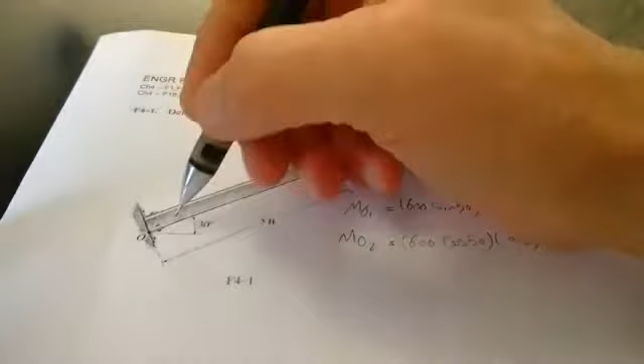So there's a question about, on the first one, how you interpret the direction of rotation. It's pretty clear that F1 is going to cause a counterclockwise rotation of that beam about O, and what you're calling F2 is oriented along this axis. It may not be so clear which way F2 is causing things to rotate, right? But realize that your fulcrum or your axis is right here at O.

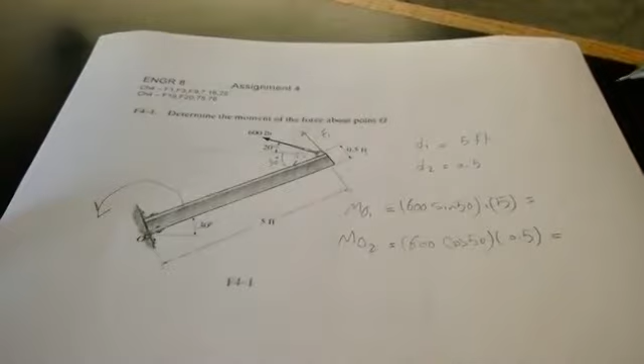What I tell people is to think of a water wheel. So if there was a water wheel right at O, which way would the vane spin if this force F2 hits it?

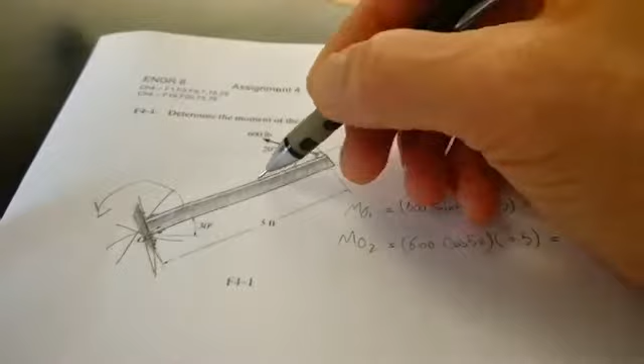It too is going to make it go this way, right? Yeah. So if it's traveling to the left above the axis, it's going to make things go counterclockwise. If it's below, it's going to make things go clockwise. And another point on this problem is you could kind of make more sense of it if...

Oh yeah, that's a really old eraser. That's okay. I was just going to erase some of this stuff here.

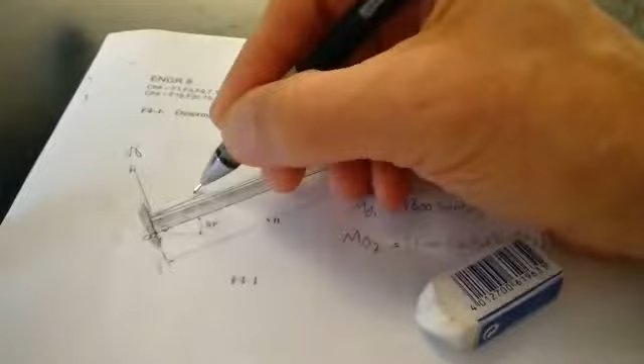In many situations they give you a problem that's sort of crooked or whatever, and you already sort of figured that out, but you can clarify what you're doing by saying, well, you know what, I'm going to make this my y-axis and this my x-axis. Maybe it comes out of O. So that way, instead of F1, you could call this Fy, and instead of F2, you can call it Fx, which kind of helps, I think, keep things a little straight. Yeah. Thank you.

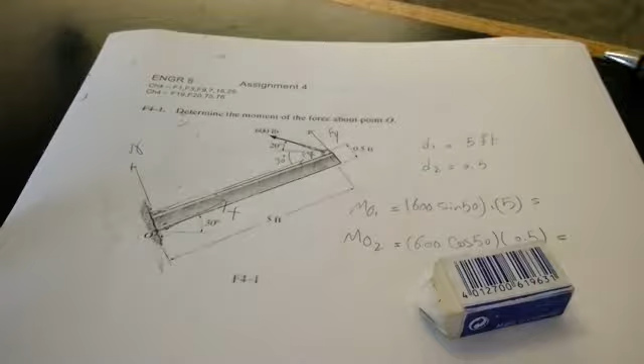Today we are doing more in-class problem solving, so guys are working together. And if a question gets elevated to where they can't figure it out themselves, then they'll come up here and I'll record it for online folks.

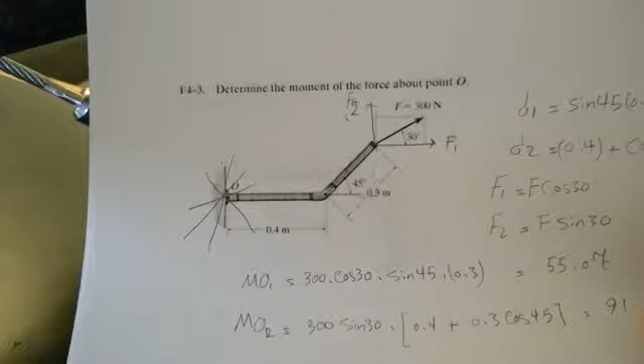So here you have a problem where you have to find Fx. And in this case, the axes are aligned vertically and horizontally, right? So it's really just the horizontal projection of F, right? You already know how to do that. What is it? Sorry, what is what? Well, your question is how do you find F1, right? No. How do you know if it's counterclockwise or it's clockwise? Oh, if the rotation is counterclockwise or clockwise?

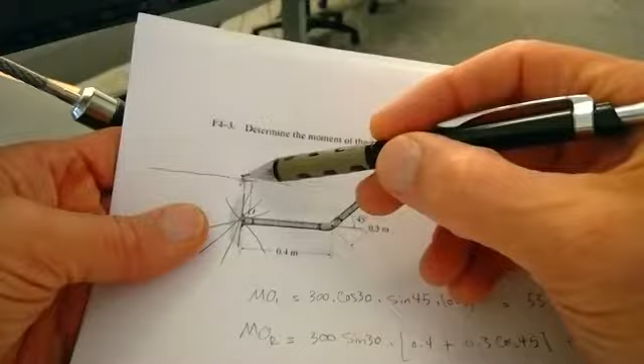Well, again, you imagine F, this is the principle of transmissibility. The force can be applied anywhere along its line of action. So in other words, you could apply the force here, but if there was like a bracket sticking up here, you could also apply it here, and it would have the same effect on the body. Because it's clockwise? It's counterclockwise. If the wind is blowing this way and you have a fan, it's going to rotate that way. Yeah. It's very simple.

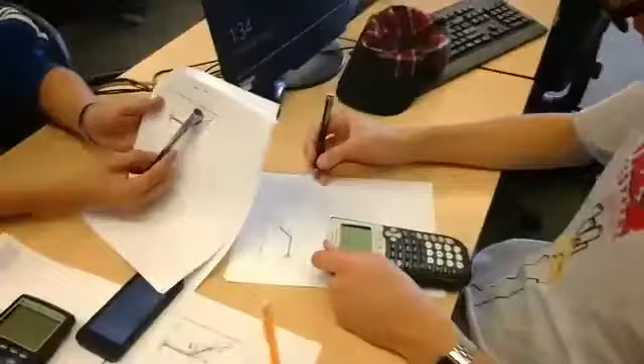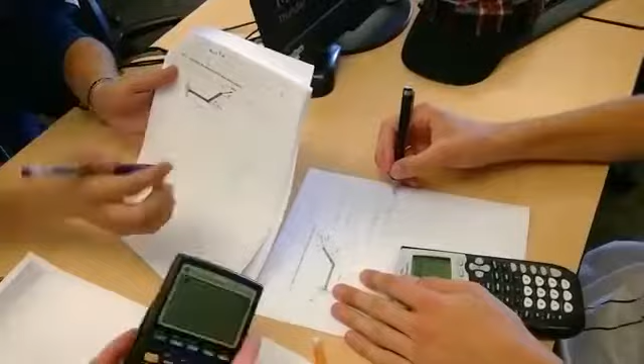No insights yet? Not so far. It's all pretty straightforward, right? Yes. I drew it like this. So since this whole thing is being pulled up at the y-axis by this force, which is 150, since it's counterclockwise, that's why I put positive. And then this one over here, which should be the same as this one, is being pulled by that component, like that. So that's why I put it here. That's the way I thought about it in my head. That's exactly right. It's just a little confusing.

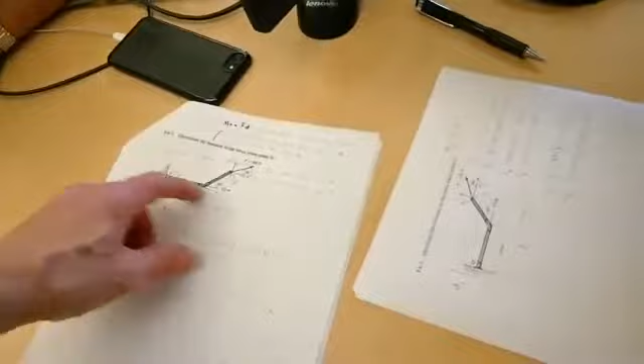And it also explains why, as this gets more and more tilted towards O, the net moment gets reduced more and more because these start to cancel each other out. The moment that wants to make it go this way from this component is going to sort of cancel out the moment that wants to make it go this way from this component, right? And then as this line goes straight towards O, they exactly balance out and the net moment is 0.

So what's the deal with having the negative sign here? Well, that's how we keep track of how they add together. Okay. But when you multiply that, there's no negative sign. Well, my instruction on the sign is to not worry about how the components contribute. A lot of people want to have symbols in there and they don't want to think about the sign. They want it to just come out of the computation. You're usually going to make a mistake if you try to do that.

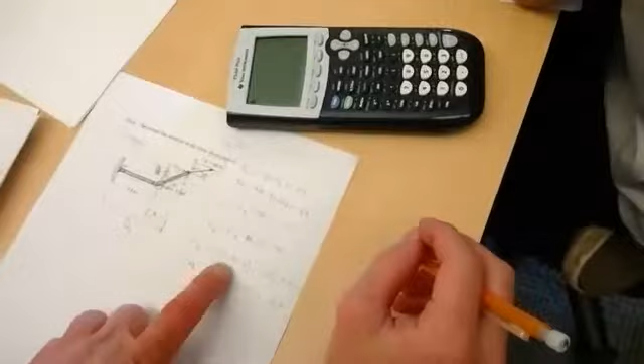So the way to make it so you don't make a mistake is to not worry about the sign when you're doing the multiplication. And then at the end, look at the number and ask yourself, is this component making this thing want to spin clockwise? Yeah, exactly.

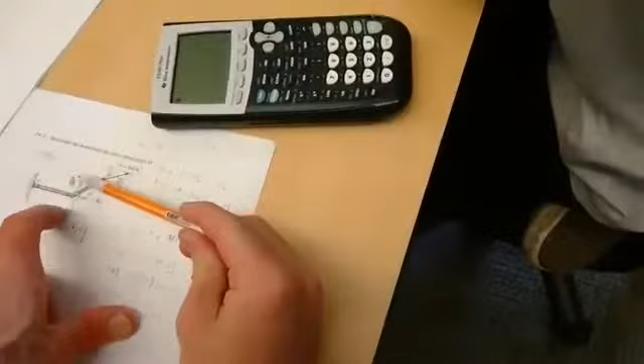Negative, or counterclockwise in case it's positive? That depends on the component. That's all you do. Just don't try to make the sign work out algebraically, because you'll never get it to work right. You have to look at the problem and it's by inspection, really. You can tell by inspection the way the sign is going.

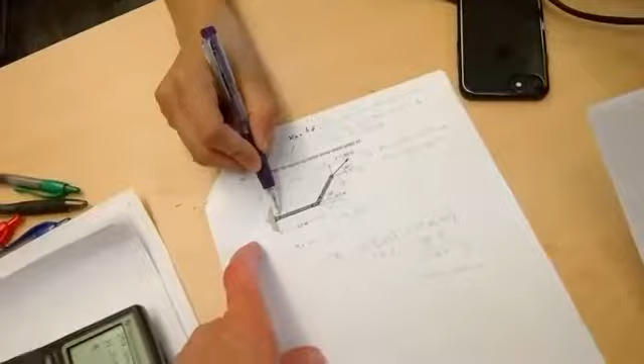So that's why these problems are in this type of course, because if this were to continue to increase, then it'd be in equilibrium. Is that what you mean? No, what I was saying is, if the direction of F changed so that the line extending from F would intersect O exactly, like this. So if the angle is a little bit less, right now it's 30, but if it was like 28 or 27, then it'd be perfectly aligned with O.

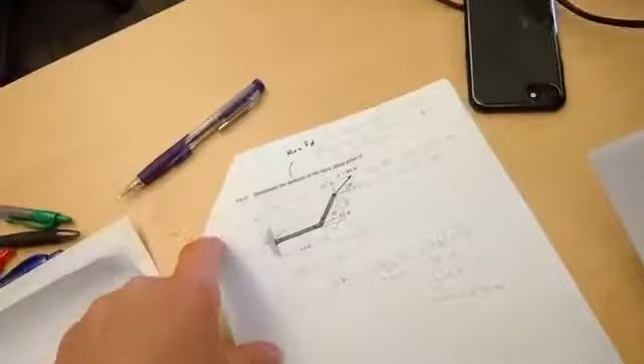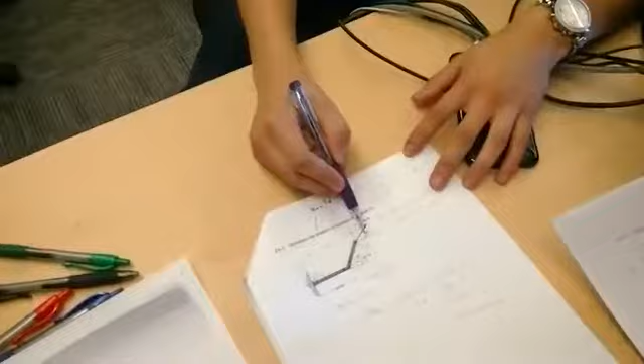In that case, the vertical component is still creating a moment that's counterclockwise, and the horizontal component is still creating a moment that's clockwise, but when you add them together, they add up to 0. So what you're saying is that if this increases, this angle's going to be smaller? No, I'm not talking about anything increasing. I'm just saying if the direction of F got changed so that this was like 27 degrees, and now it's coming straight out of O, that's why there's no net moment, right? There's no moment arm.

Right. And you can also prove it by these components, because now the vertical component, which wants to make it go this way, would exactly cancel the horizontal component, which wants to make it go that way. Yeah, that's interesting.

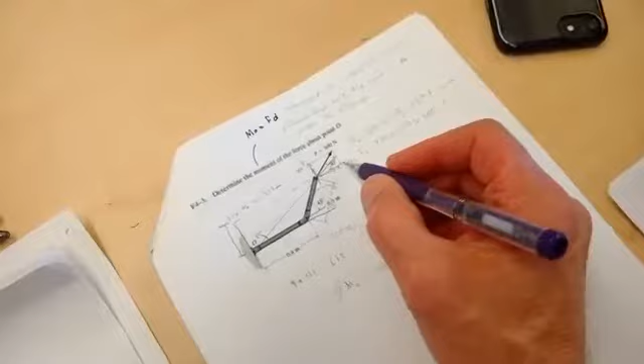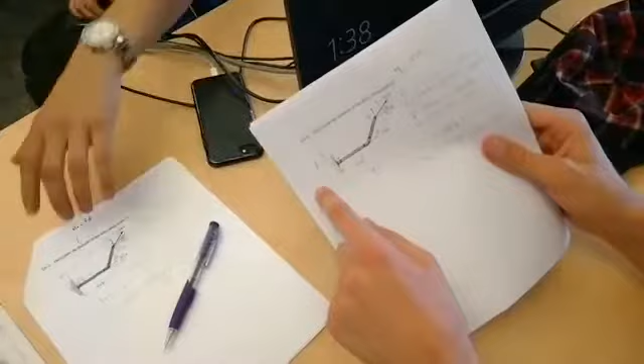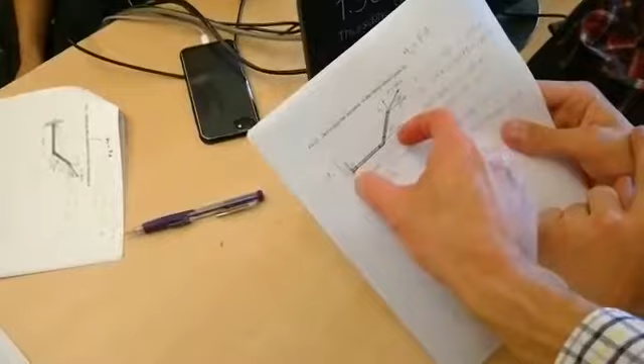So why is the y component negative if it's pointing to make it go counterclockwise? The y component has a moment that's going to be counterclockwise, so that should be a positive moment. Right. What are you calling MO1? I don't know what MO1 is. That's the y here. Okay. So if MO1 is Fy times... oh wait, so the 0.612, D2 is the moment arm for Fy. I don't know what the unit is. I think I'm just getting my numbers mixed up.

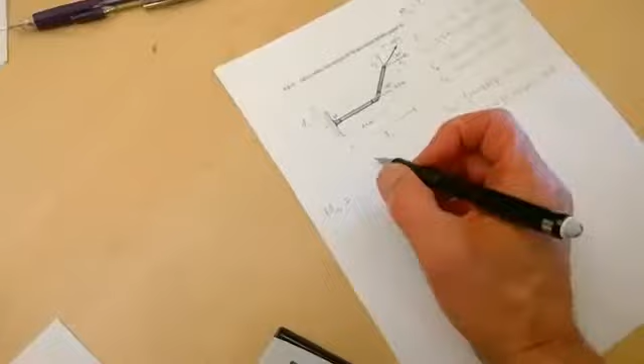Yeah, you can easily put the wrong D on the forces and then you get really wrong answers. So you have to be really careful about this. In fact, I would just say MO equals, you can use symbols here, right? It's Fy times D2. This will help you straighten things out. It's Fy times D2, and that's positive, right? And then it's Fx times, you haven't labeled D1, oh, there's D1. And it's Fx times D1.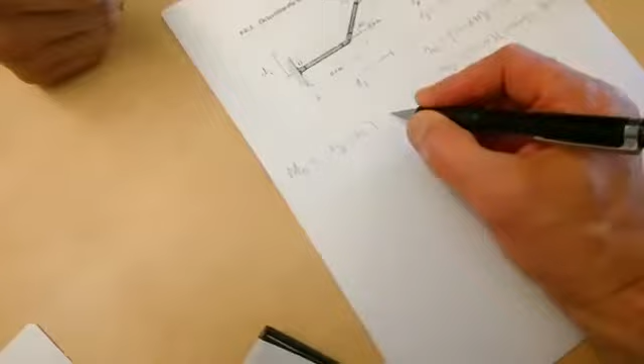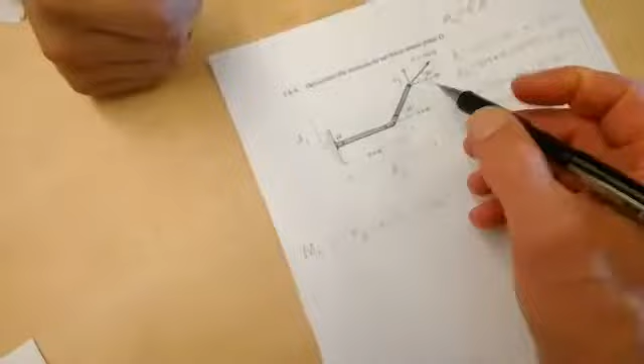Then you write these things out and look at each one. Is Fy times D2 going to make things go clockwise or counterclockwise? Look at Fy, pulling up right here. You can apply Fy anywhere along its line of action. So imagine this is a big water wheel. If this thing is pushing up on a water wheel, which way is it going to turn around O? Counterclockwise, so that's positive. I mixed up my components. Yeah, it's easy to do.

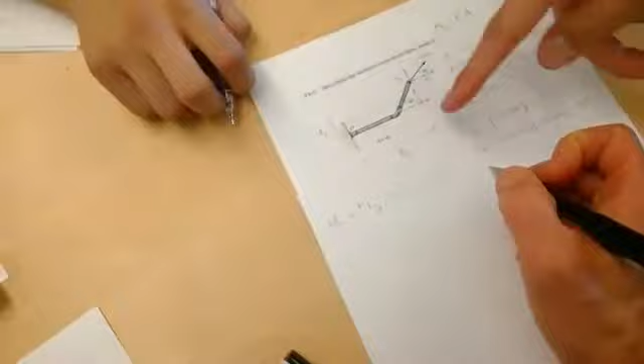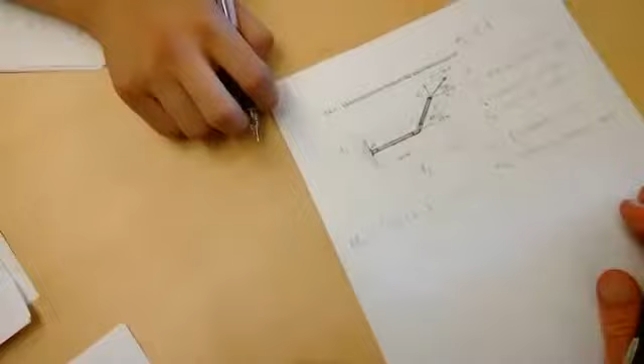And Fx times D1, again hitting that same water wheel, but now it's coming from the left and moving to the right. Which way is the water wheel going to turn? Yeah. Clockwise, right? So there's a minus there.

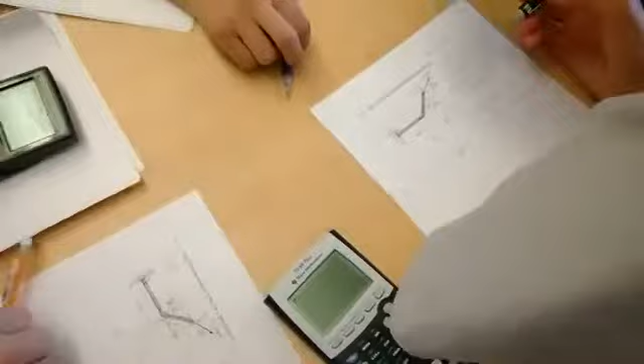The way I figured out if it's going counterclockwise or clockwise is, when you're looking at the y components, the line of action is horizontal, and the x components is here. So when it's horizontal, if you look at just the y, it's going to go that way. But the other way, it goes the other way. What you just said, I cannot parse. Try to say it again with fewer words. Hmm.

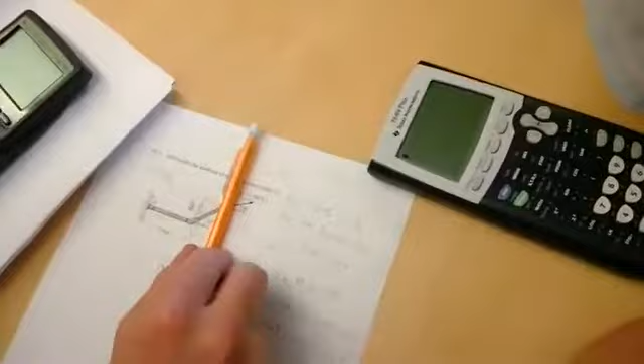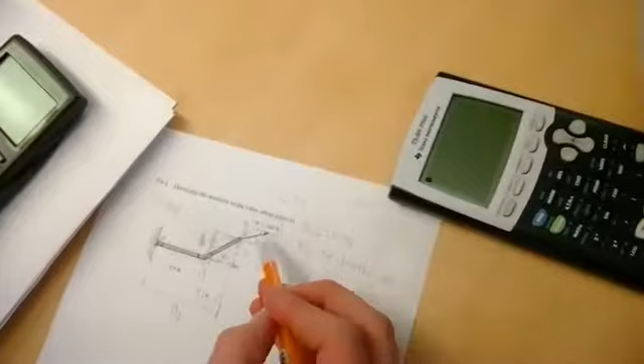When I was considering the fx for the direction, I actually looked at the vertical line relative to it, because that way you can see like it's going that way.

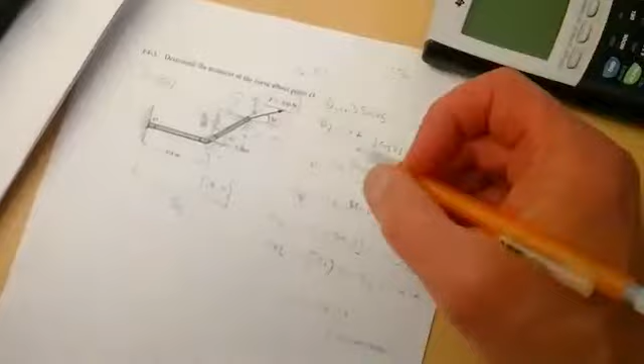You mean the rotational direction, the force is trying to go that way. So when you're looking at fx, you start to think about the vertical component. That really doesn't have anything to do with it. The vertical component of f doesn't have anything to do with fx or the moment. I mean, I got the right answer though when I looked at it.

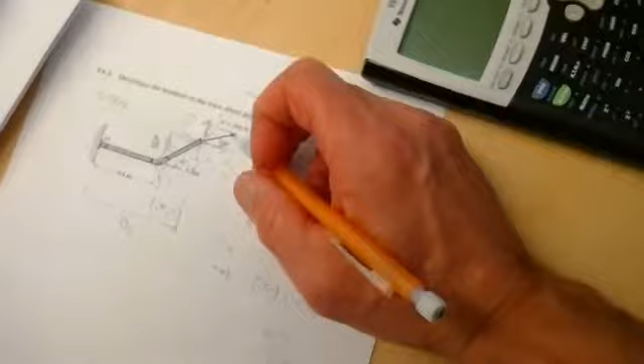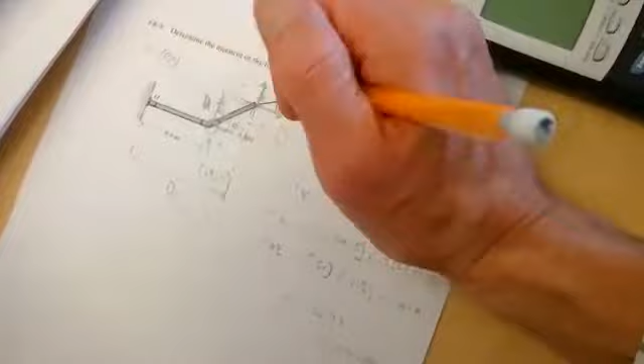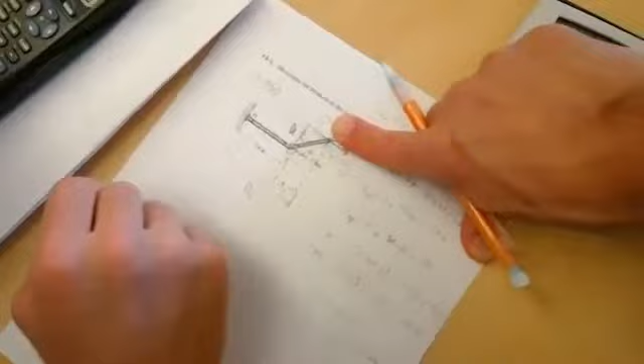You have a 50% chance of getting the right answer, but over time, if you don't really understand it, you're not going to get that right all the time. So it all comes down to how is this force going to make this body spin about O? How far can you get? It doesn't matter if there's a vertical force or not. If it was completely flat, how would that force make this pipe spin about O?

This x force - well, yeah, then it's clockwise. And clockwise is going to be, we're going to call it negative, just for convention.

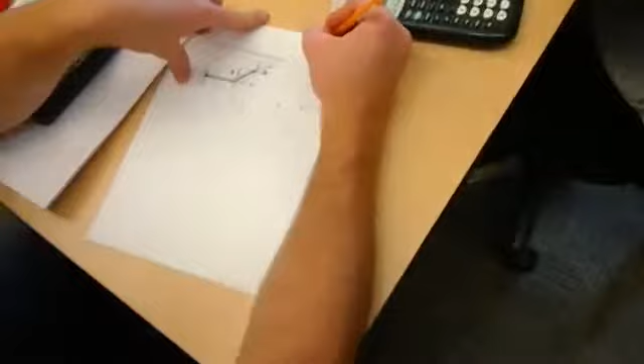I get the whole process, but what does this number mean at the very end? Like what is the value of MO? Like what is that? Do you know what a torque wrench is? Have you ever worked on cars? No? I know it is. Are you mechanical? You're a civil engineer. Okay, what's a torque wrench?

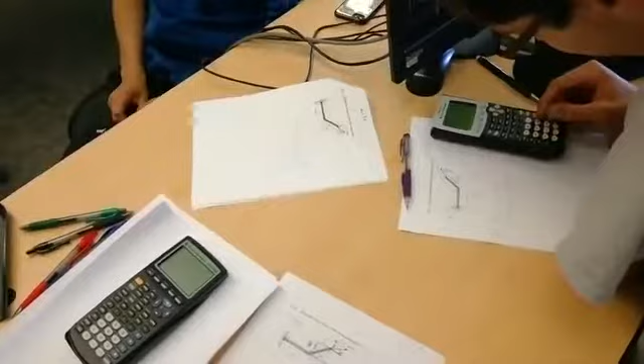It measures the torque. You can torque things to appropriate torque - a lot of the bolts in an engine are specced so you can only apply so much twisting force to it. So a torque wrench has a lever on it, and then it has a wire that's not connected to the wrench, so it's calibrated to kind of bend, and then there's a scale on there to indicate how much twisting force you're putting on the bolt. If you put too much, the bolt breaks off, and then you swear, and then you got to go find a way to remove the screw from the hole without a head on it.

Torque wrenches are supposed to keep that from happening because they tell you when you're going, and you have to look up the spec for each bolt that you're working on in an engine block, because that really is annoying when that happens. That's the twisting force - that's a torque.

Hurricane Irma is a big torque, basically. A tornado is a big torque - Mother Nature's rotational force. Irma doesn't move very fast, but the winds are whipping it like 150 miles an hour, but the speed of the storm is really, really slow - like the net speed of the whole thing.

So then that number pretty much signifies the moment, the movement. It's signifying a rotational force. A moment is a rotational force. So it's just how much tendency there is to make that thing want to spin.

If this object is going to be in equilibrium, then not only do the vertical and horizontal forces have to be in equilibrium, but also the rotational forces have to be in equilibrium, because if they're not, then the thing's just going to spin. So later on, we're going to be doing systems of equations that involve rigid body systems, where we have to check not only that the forces all add to zero, but also that the rotational forces add to zero. These are the moments.

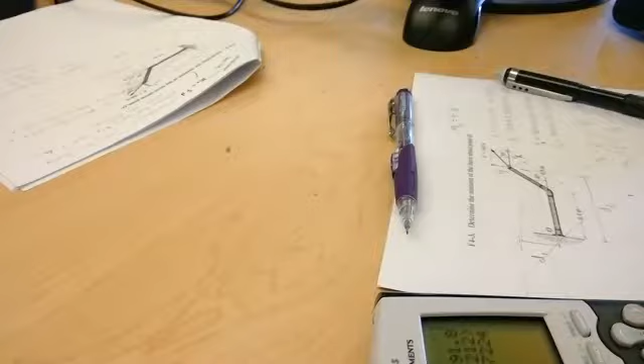You said the moment is in the perpendicular direction, right? What do you mean, perpendicular to rotation? Well, between work and moment: work is force times distance along the line of force.

A torque or moment is force times distance, but the distance is perpendicular to the force. It doesn't have to move. A moment doesn't require anything to move. So even though moment is force times distance, it still has the same unit as work.

But it means something completely different. Work is like energy, and things have to move to have work. Moments don't have to move at all.

You can apply a twisting force to a screw or a jar. Next time you try to open a jar, think about how much moment you're applying to it. That's a torque. The jar's not sliding left or right, you're holding it in place. There's no net force, but you are causing a twisting force to get it to open. That's the moment.

Oh, I see. Gotcha. I understand the difference now. That's funny. Who would have thought?

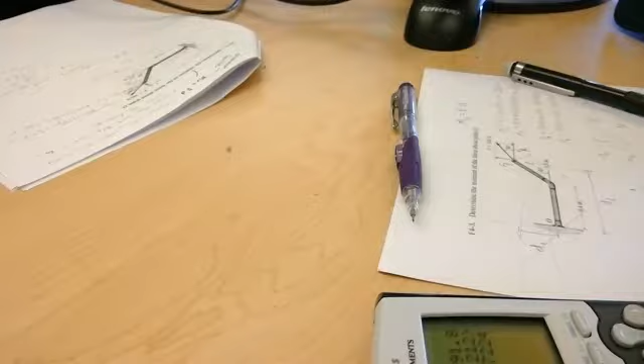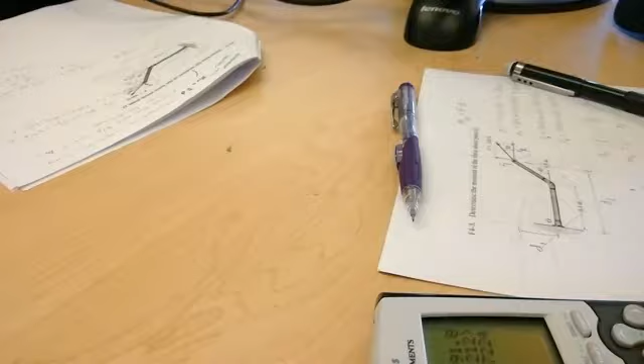So how do you differentiate? What's the difference between moment and torque, or is it the same thing? It's the same thing. Some books call them torques, some books call them moments.

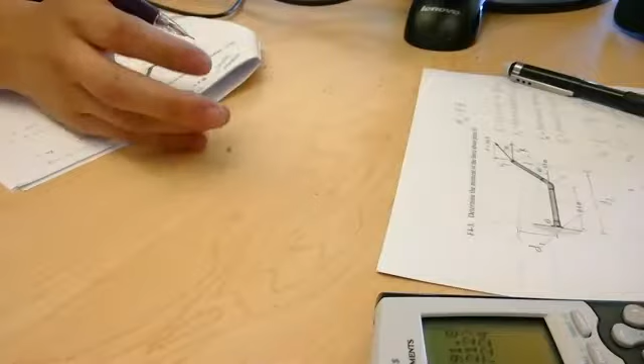Generally engineers call them moments, mechanics probably call them torques. Physicists call them moments too. Sometimes in Europe they call them something else, in Britain they might call them something different. But it is the same thing.

Moment. Okay, good to know. That's why you're doing all this stuff, and that's why they're looking at these rigid bodies.

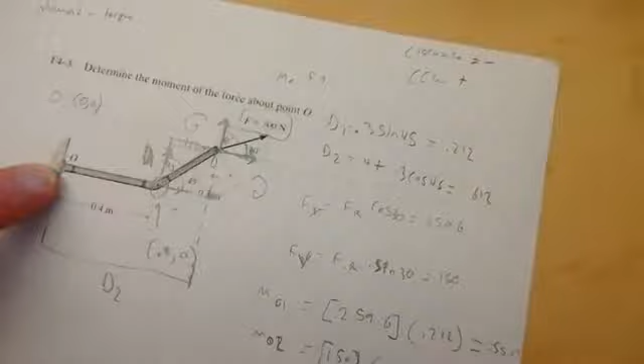So in order for this thing not to actually spin - and this is kind of a preview - this thing is being supported by this bracket which is screwed into the wall. So there's a lot of force on this.

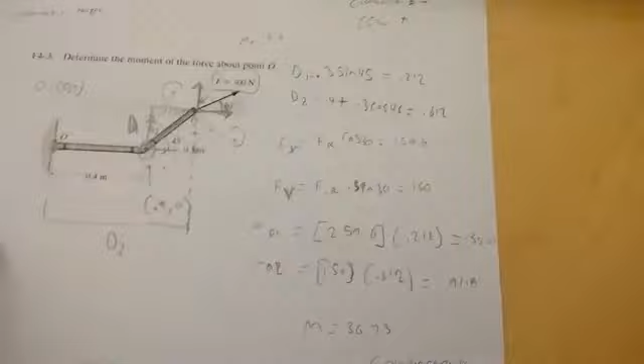In order for this thing not to just drop, because of this force pulling on it, I'm going to try and solve which way the net moment is. Is the net moment clockwise on this thing, or counterclockwise? It is counterclockwise.

So the line of action is going below, so it's actually trying to make it go that way. Well, if you also add in the fact that there's a weight on here, the weight of this thing is also making it try to go that way.

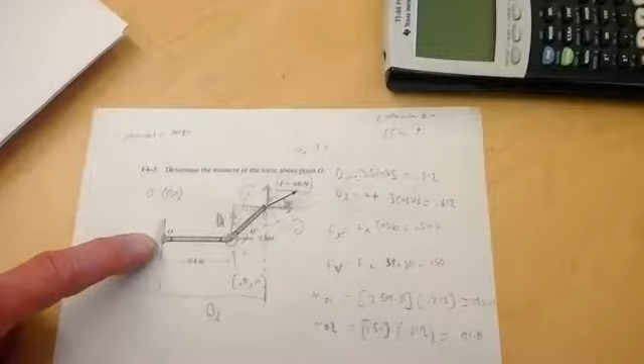Whatever is not balanced between the weight of this thing causing a torque and this thing causing a torque going the other direction has to be absorbed by this bracket. Otherwise, the whole thing is going to break or fall or twist off one way or the other.

So there's bolts that are also applying a moment. And guess what kind of moment they're applying? In a way, they're kind of like a couple there.

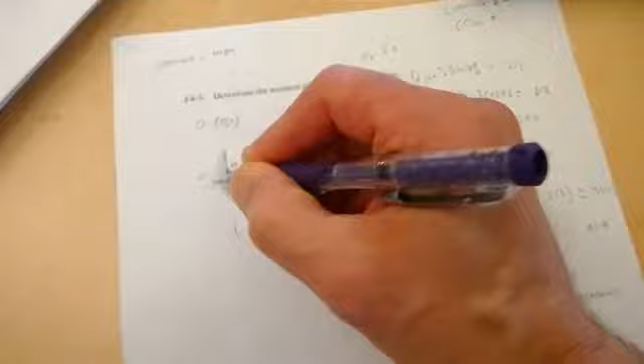There's like 6 bolts or whatever. The top ones are actually, if there was no force here, like if it was just the weight of this thing rotating this way, then this would be applying a couple to counter that.

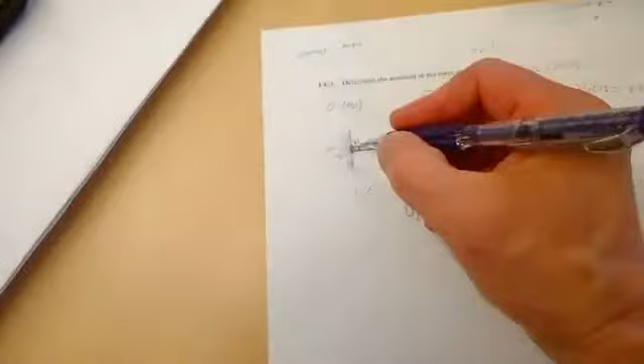The top bolts would be holding it in, and the bottom bolts aren't doing anything - it's just the bracket getting a normal force from the wall to push it out. And that provides a counter rotation to keep everything balanced.

Are you going to later figure out how to do that? Yeah, like next chapter. But we're going to play around with this stuff for another week. Okay, good, that's good.

We're going to be looking at moments in 3 dimensions, and then how to reduce complex systems of forces and moments so that they're simplified and easier to work with.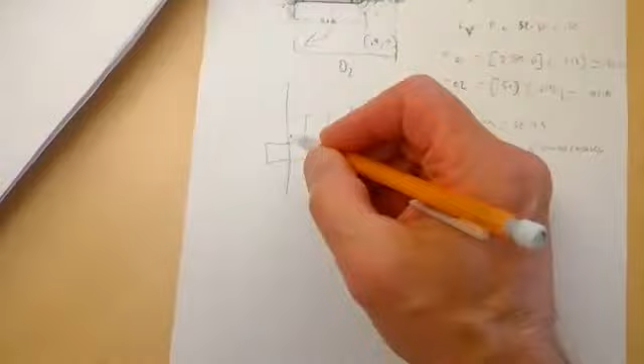So you said the bolts on top of the bracket would hold it up. Yeah, like from falling. It's like a cantilever, like if you have a balcony or something against the wall. It may go into the wall a little bit, but you never really know how those things are actually rigged up. Maybe there's some bolts holding it into something stronger. But if it was just a board stuck in there, even like a diving board, you can imagine what's happening if it starts to drop a little bit.

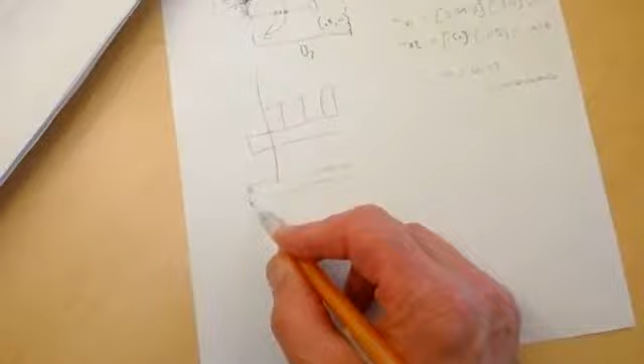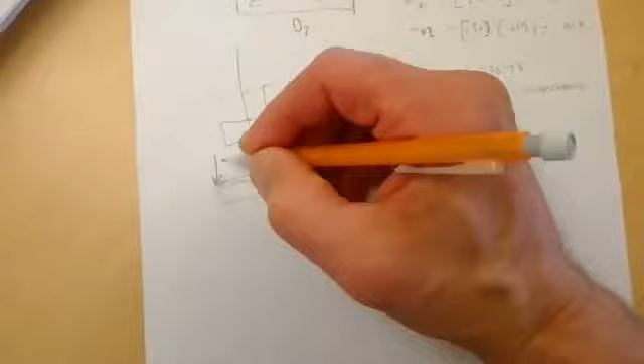What's going to happen? The back of the board's going to hit this corner of the slot, right? And the wall is going to be pushing down on it because if it wants to twist this way, the bottom is going to be pushing up right there to hold the thing up. So you have a moment here causing a counter rotation this way. So if the board doesn't fall, it's because of the structure providing support.

And these are called reactions, the reactions of the structure on the body. Next year we're gonna figure out the counter forces, right? Yeah, we're gonna have to figure out all these reactions because when you design something, you got to make sure it's going to be stable. So the reaction forces have to meet the load forces that are trying to make it spin the other way.

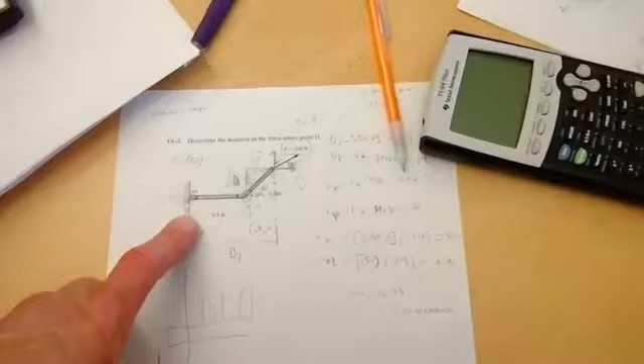And you have to design these brackets and mounts. As an engineer, if you're a structural engineer, you got to be able to spec these things so they can handle all the load they're going to get. You have to understand the load - it's a really important part of that.

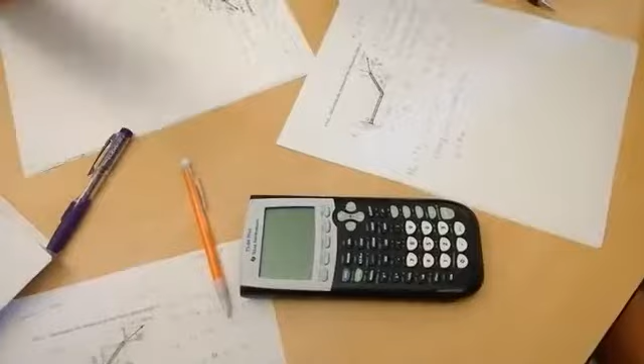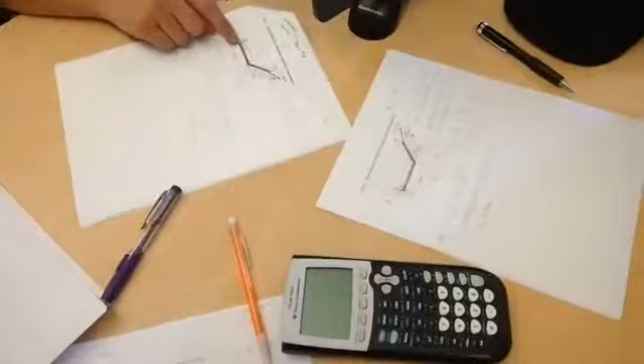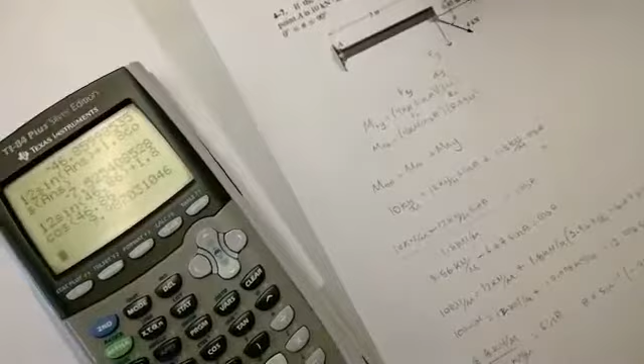Yeah, I got a question about 4-7. So what we started with was breaking this down to the X and Y, and then defining the value of 4 kilonewtons sine theta for the Fy, and 4 kilonewtons cosine theta, and we put our distances in and everything. So we set up this equation, plugged in this, found out what these are, all together multiplied, and we got all this, but we have it in sine and cosine.

So since those are two variables, is there an easier way to do this? I think you're gonna have to just guess those - that's a real guess and check. Just iterate, you can guess because it's a transcendental equation, you can't really solve that. There's no trig formula to reduce that as far as I know. But you can plug in a bunch of numbers.

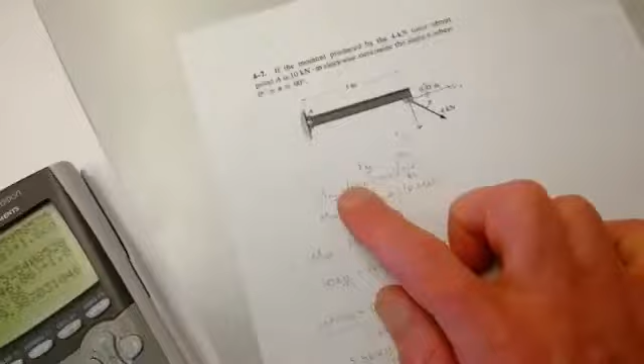However, I'd like you to go back and look at this and realize, did you check the sign of these? Components? No, yeah, okay. The sign, yeah. So I think you're going to want to redo that. Okay, well, I think there's a sign issue.

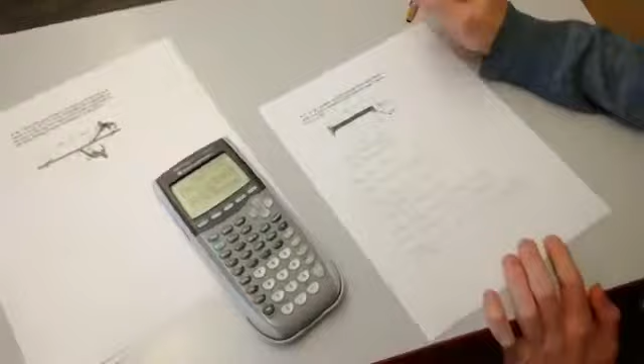You guys got to run because there's nothing coming in here. I'm going to go, but you see how effective it is when you're working with people, as opposed to doing it all by yourself. Yeah.